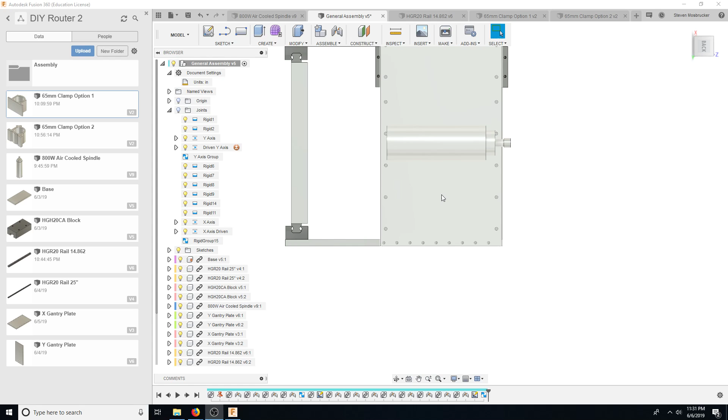We've done almost 4 episodes tonight or so, and I just wanted to clean this up because tomorrow is my last day in San Jose for a week, since I'm shipping out Saturday to Hawaii, Maui, and I'll be back next Saturday. Tomorrow I wanted to do a video focused on the Green Engineers to update everybody, but I also wanted to do a few more videos on this because I wanted to get this pretty much completed. So when I'm in Hawaii, I could be looking for lasers and also buy parts for this, because it's looking like we're really, really close.

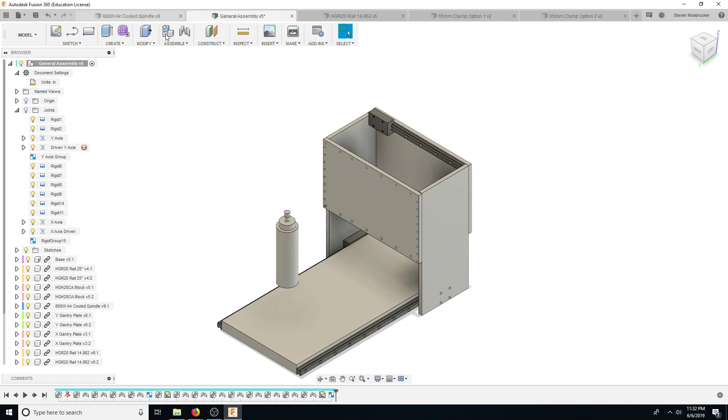I'm probably going to increase this to double so it doesn't bend, keeps it inside the cut. So we're going to put one here, one here. We're going to have 4 rails here with the regular HGH20CA block, and then we're going to put double here, double HGR20, so 2 blocks here, 2 blocks here, and then that should be incredibly rigid, and we'll increase it to about 100 pounds.

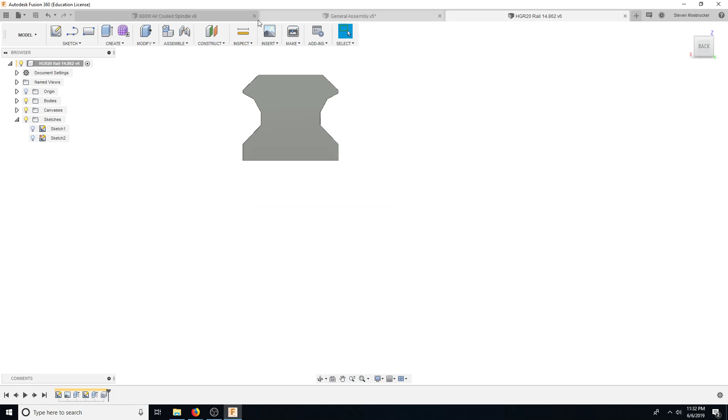Right now what we're going to do is delete this one and delete this one, and we're going to design the clamp. So the clamp, obviously the maximum here that we need to have is from this level to this level. And that is 10 and an eighth inches.

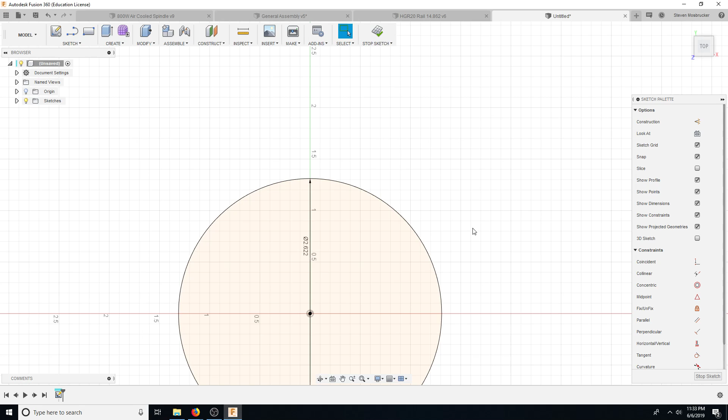Let's go ahead and start a new one. Let's create - we don't really need much, so we're just going to go here, top. And then this is going to be the 65 millimeter. Then what we're going to do is slit it so we can clamp it. Let's go ahead and add an offset of a 1/16, plus 0.0625 inches, just a little bit bigger - 1/16 of an inch, so that's a 32nd on each side.

If we machine it really well - again, this is going to be 10 inches tall, so probably machine this. I mean, that's pretty big. You're going to machine it all the way down, but again, this will also form a pretty good heat sink because it will be 6061 aluminum, and it'll heat sink it to here, and then it'll have a big mass around here, and then heat sink it to the rails.

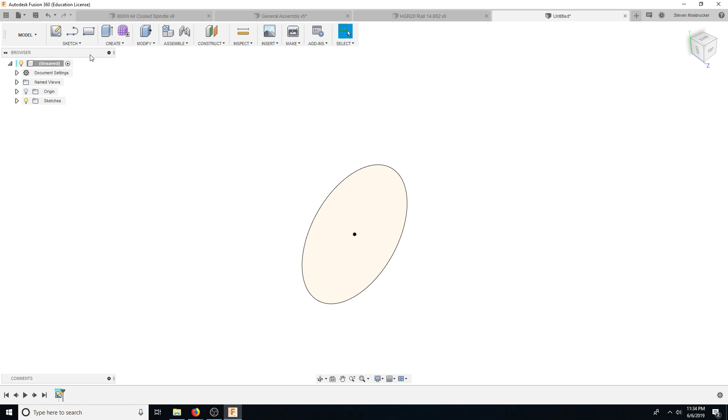So let's do that, and then let's go ahead and create an offset. Here, offset total - obviously we do not want to pass this other number here, which is the length of the carriage, which again is this overall length right here from here to here.

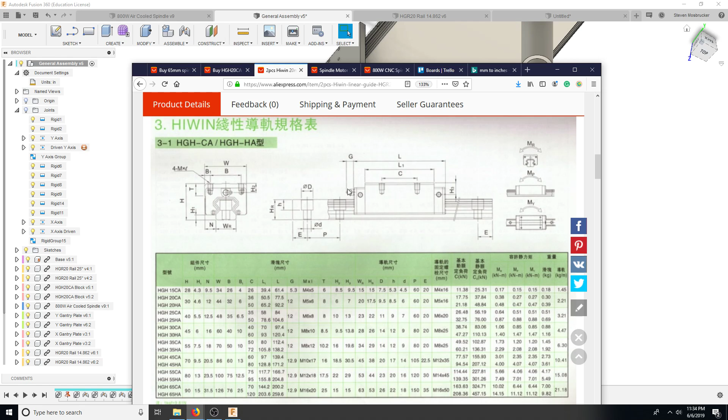Oh, and then everything - I'll probably take off the grease fittings and just put them on when I need them, because they're going to hit on one side. I'm going to lose something on one side anyway, so I probably should take them off. Down here, they're not really that big of an issue. I mean, it's going to hit the back wall over here on one side, but I think that side will be behind this gantry anyway, so it's not really that big of a deal either there.

Let's put - but these are going to be used a lot, so probably once a month I'll have to stick the grease fittings on there and redo it again and grease them. So overall length for the 20CA is 77.5, so we cannot go over that.

So this distance from here to here, let's go ahead and do that. This distance from here to there is 70 - let's just do 75 millimeters. Okay, so what do we have here? Again, this doesn't have to be big because it's going to be super... okay, so it's a little over 1/8 of an inch. That's going to be fine because this thing's going to be like, what was it, 10 and 1/8 long.

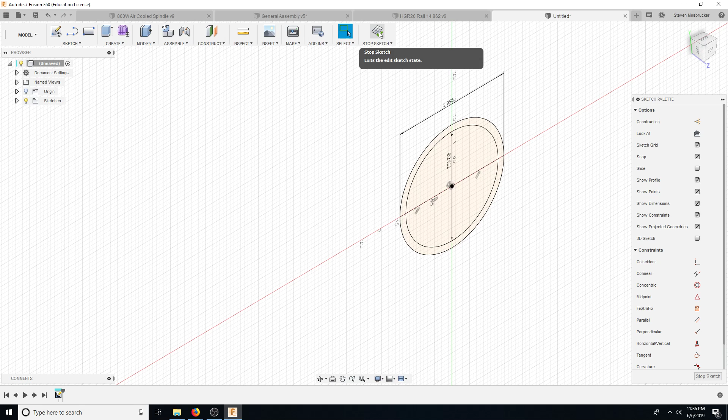So that's fine, and also it's going to have a flat section here. Oops, so we need to make the flat section here.

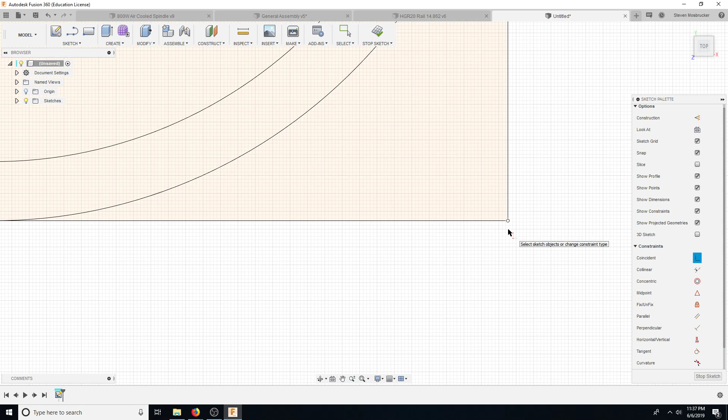And there we go. So that's a flat section, and then we'll have a hole here, basically, kind of just a slight flat section down here that will put these bolts in. And so that is C. So let's go ahead and do that now so we could draw it later.

So basically what we're going to do is we're going to go here, and then basically we want B divided by 2. So B is 32 millimeters divided by 2. So yeah, that's this. B. So there's going to be a small little flat section there. 32 millimeters divided by 2. Okay, so now that's going to be a small little flat section.

And so we're going to go up, but it's going to be bigger than that. So I'm going to say at least, oh, but it's not B, it's actually C. Okay, so we only need to do C. So C, because the rail's like this, so it's actually just C. So C is way smaller.

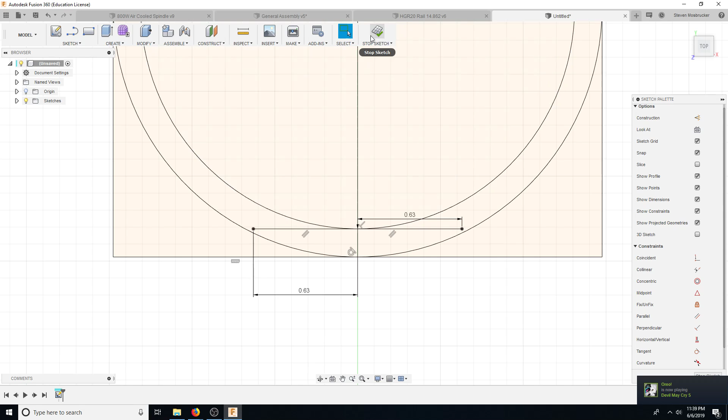So this should be okay. And let's go ahead and do this, this, this, and this. So it's going to be a small little flat section. Obviously, we can't make the walls around the wall square, so there'll be a fillet there.

But the issue is that that's really, really far down. But we only need it in certain sections. So we only need it at the top. We only need it at the top small section. So we could use a small end mill here and then hog everything else out.

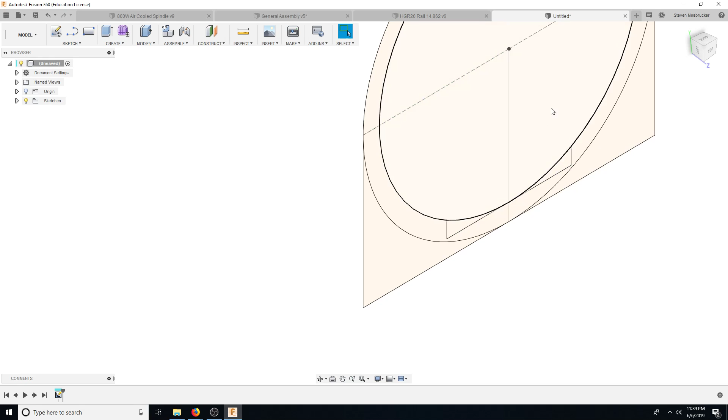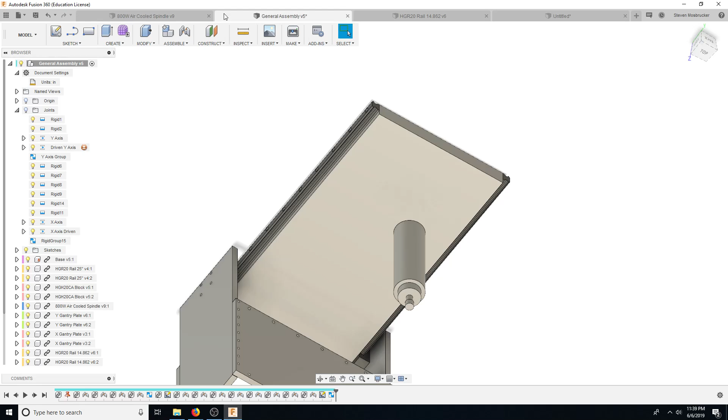So let's go ahead, I'm definitely going to need my XBoss to help me out with this here. So this is only going to be the width of the block, which is 44 millimeters. Oh, we can't do this because we need the Z. Completely forgot about the Z. So we need some sort of Z control.

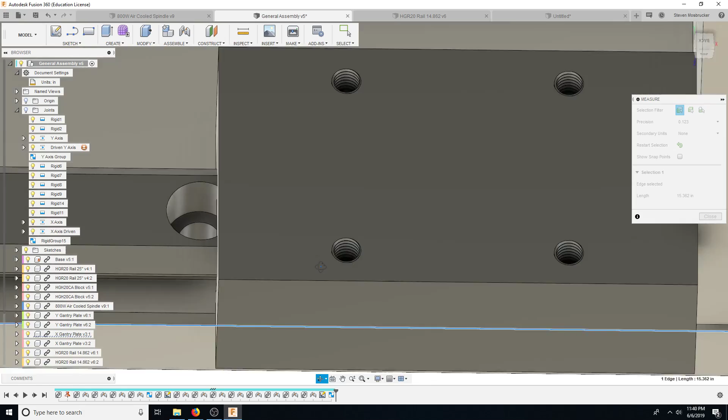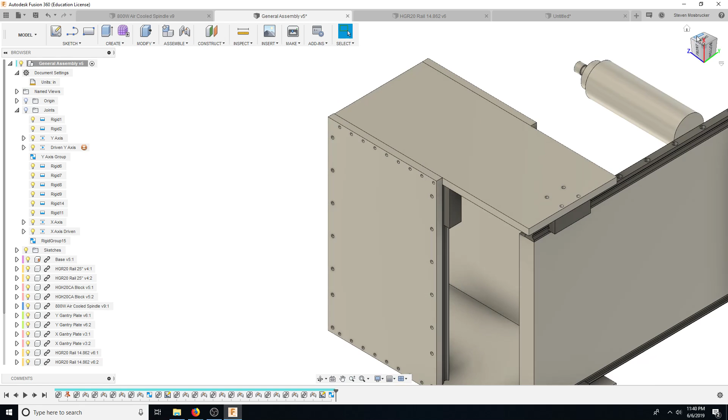So I mean, technically, oh, but then we need the width of the rails. The rails have to be next to each other. I mean, the carriages. So what's the width of the carriage? Yeah, this is 3.5, right? No, it's just 3. So yeah, 2 carriages won't fit on that.

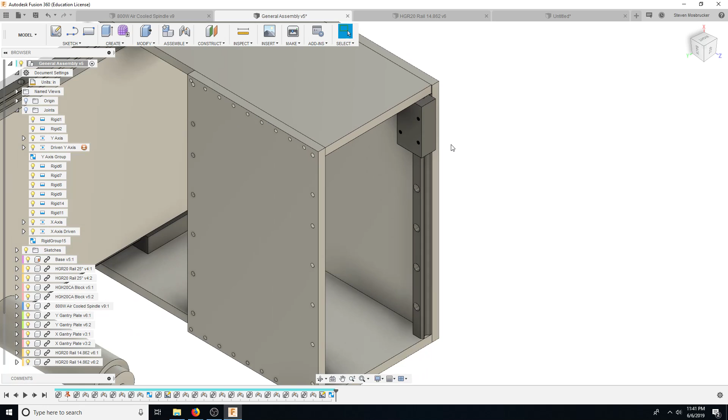Only one is sketchy. Oh, but we'll have another one over here. So, I mean, we do have a lot. I mean, but we don't have a lot here. But we have a moment arm down there, which is just as much as if it was over here. So we should be okay by just putting one of these guys, one of these blocks, which are... Oopsies. 1.732.

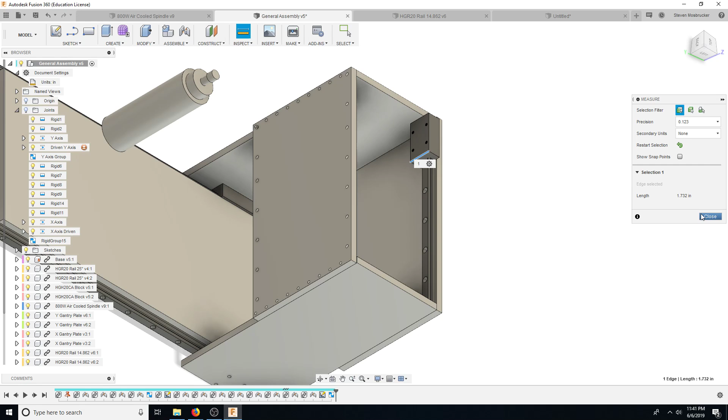Okay, so let's hold on this for now. And again, also, this thing doesn't need to be as big as I was thinking there because we have the Z. The Z is going to be the big guy.

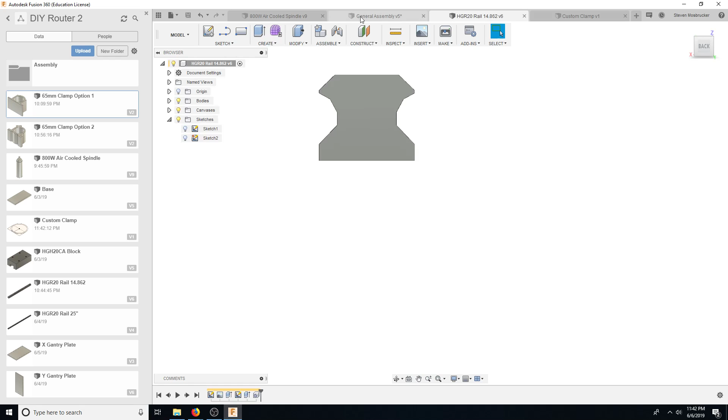So let's go ahead and look at this. So we're going to do the same rail again. So we're going to have a custom length rail that's going to go from here to here, which is 10.5 inches. So let's go ahead and duplicate, copy, paste.

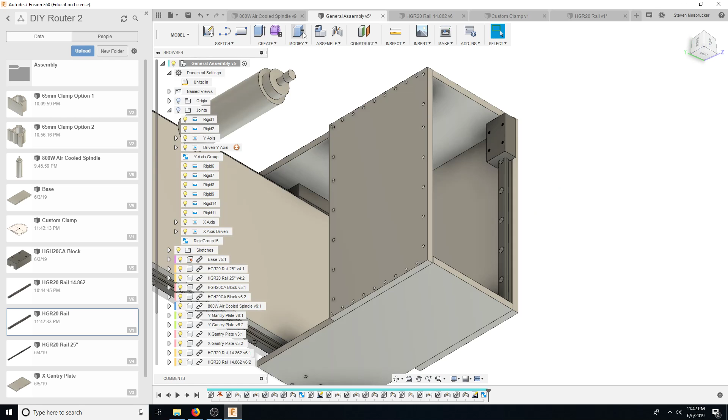Let's go ahead and look at this one again. I think it's this one. Yeah, 1142. Yeah, so that's right. First off, let's rename. And let's just get rid of this for right now, just so we can kind of tell. And then this is going to be 10 1/8. Oops. Actually, let's get exact measurements here. Yeah, 10.129.

Okay, so let's rename this. Well, that's okay, because we could.

So we could have it mounted on the bottom. This guy will go on the bottom because that's where we need the most, and not as much on the top. We'll have a bolt opening on the top, just go here or something, or we could always drill another one.

Okay, so now we got that. Now let's go ahead and design the plate, which is on top of the regular HGH20. We're going to want, we could put 2 of those on there. And we want a total travel.

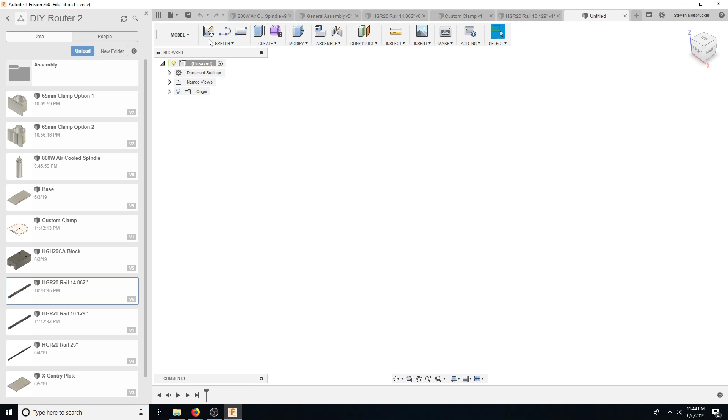Cat's looking through the window here.

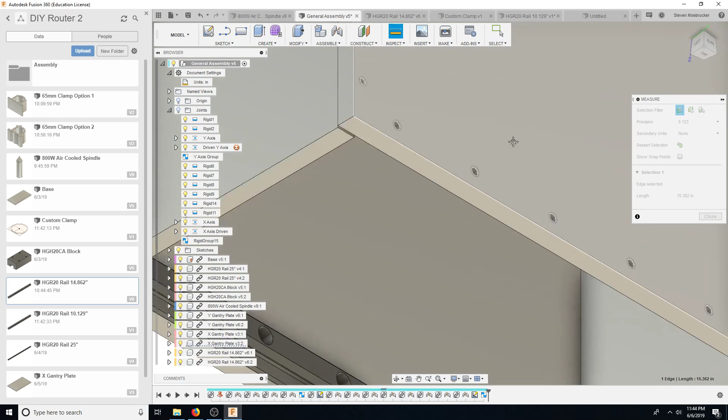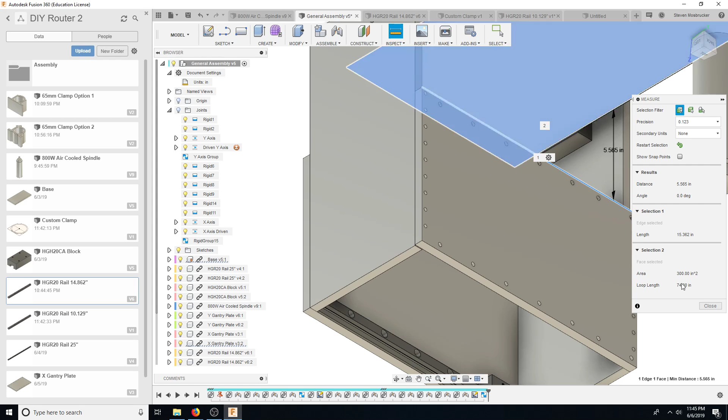Alright, so we want a total travel. This is 5.5 inches, minus about half an inch for the end mill. Let's say half an inch minimum for the end mill, and then most material is going to be at least 1/8 of an inch. So let's just say 5 inches of travel for right now. So what is 5 inches of travel? So this is a total of 10.

So can we get 10? We want 5 inches of travel, so we need 5 inches of movement. And these things are how long?

I mean, we could do one, and then obviously we're going to have one on the other side. So this is 77.5, 77.5, it's 3 inches. Yeah, so not enough for 2. That's 6 inches, so it'll need to be 11.

So unless we have this counter it off a little bit, we can't put 2, but I would like to do that just for the rigidity. So we might have it stick out a little bit. Well, it's going to have a plate underneath it, but the other issue again is with the grease, but we could have one grease going up, one going down. Not a problem.

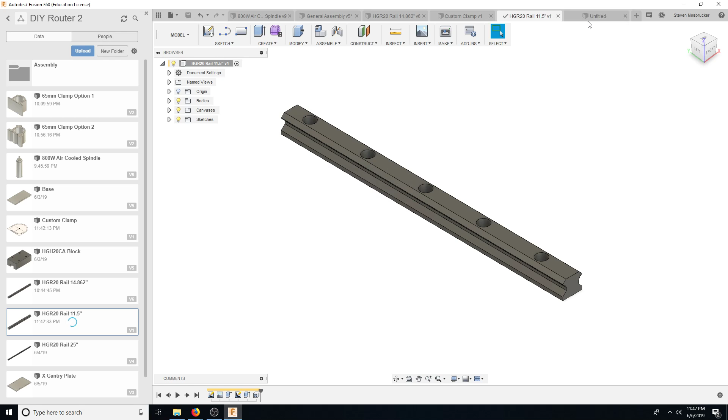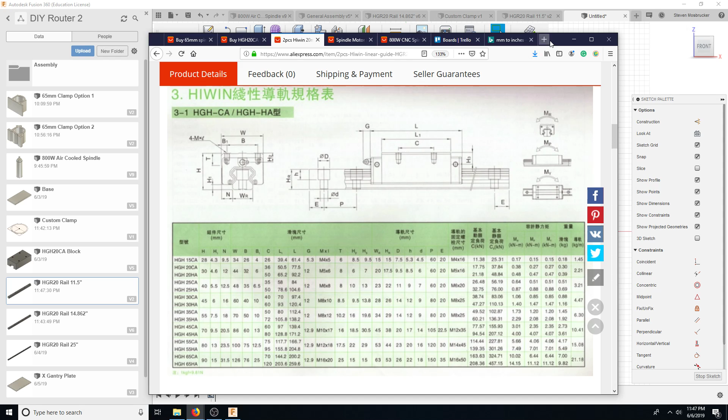Alright, so now the plate is going to be, let's just go on top here. It's going to be as long as these. I mean, it doesn't even have to be as long as these, it just has to sit on here, because any longer it doesn't really do anything. So L1 on those is 50.5, so let's just do 50.

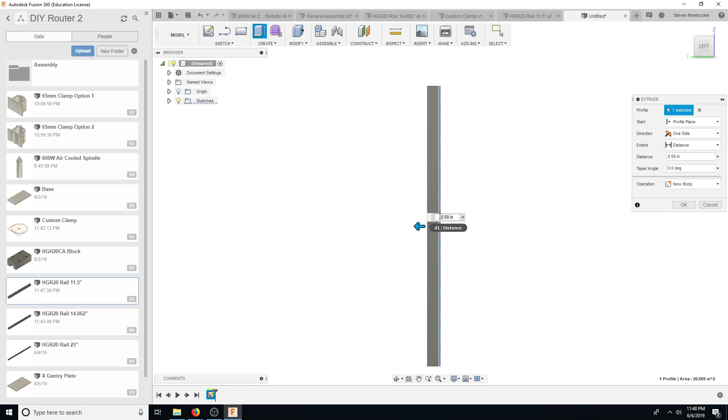0.50. Oops, the caps lock is on. And then this is going to have to be at least, what, 10.5. Okay, and then remember, the thicker this goes, the harder it is, the more we lose. And again, it's pretty supported, so I think 1/4 inch aluminum should be fine, 1/4 inch plate should be fine.

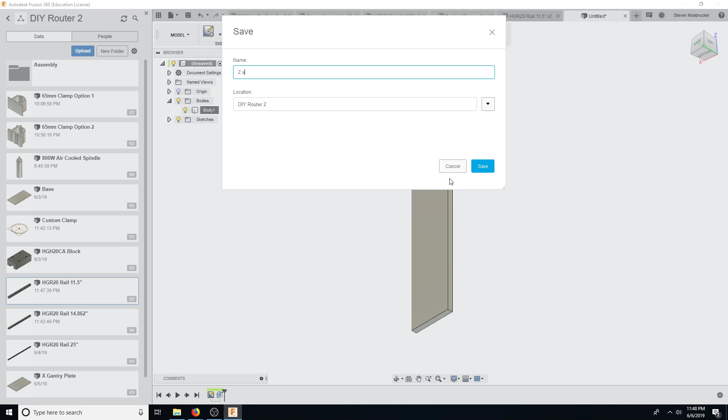And let's change the body style of this guy to physical material, aluminum 6061. Boom, boom, boom. And then this is Z-axis plate. What do you call it? Z-axis gantry plate. Okay, so there's a Z-axis gantry plate.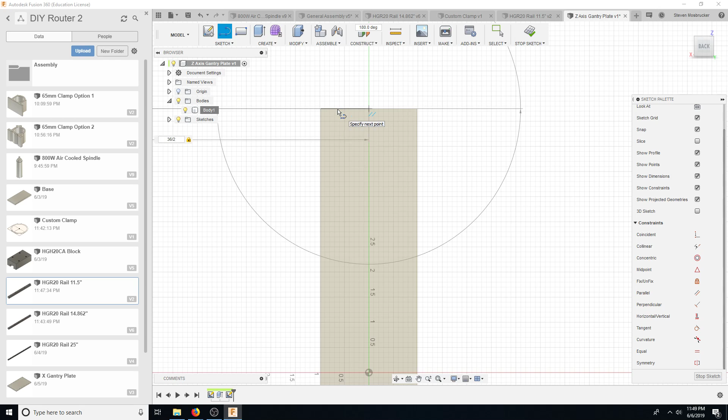Now let's go ahead and do the holes here. So at the top here we have W. Let's go ahead and draw a line from the top. Well, we don't really need to, but now we need W, which is, or C. It's going sideways, so we just need C here. C divided by 2, which is 36 divided by 2, which is 18.

18 mm that way, and 18 mm that way. Okay, which that's correct, right? Yeah, that's correct. And then this, we're going to have B1 from the top, which is 6 mm. So that's the actual point right there. And then this is also 6 mm, 6 mm.

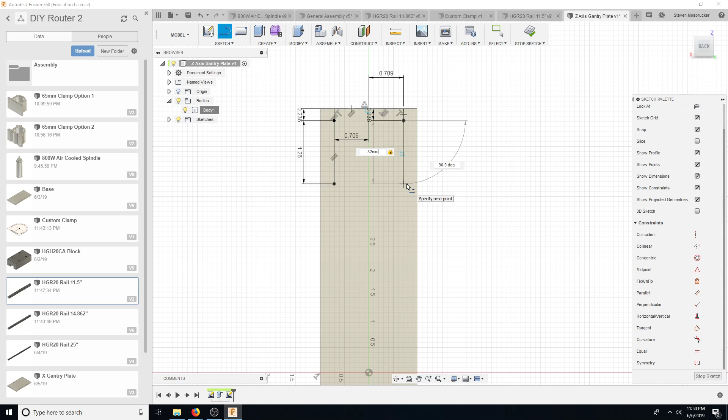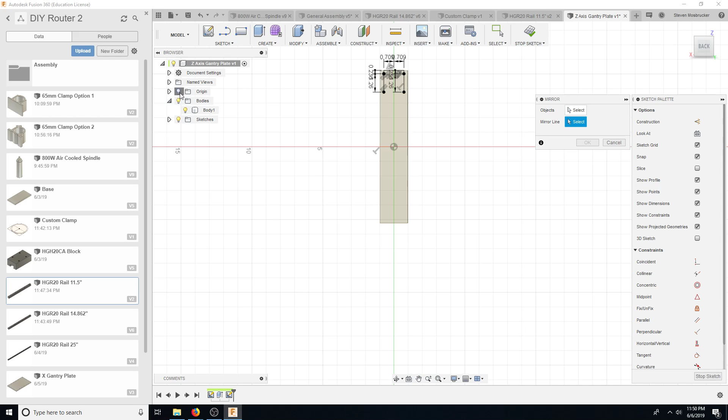And then B, which is 32 for the next set down, 32 mm. This one also down, 32 mm. Alright, so now C split, that's good. And then point here, here, here, here. Okay, oops, so now let's do the same deal. We'll do the standard mirror procedure: mirror lines, open origin, pick that mirror line, close origin again, object, 1, 2, 3, 4, and OK.

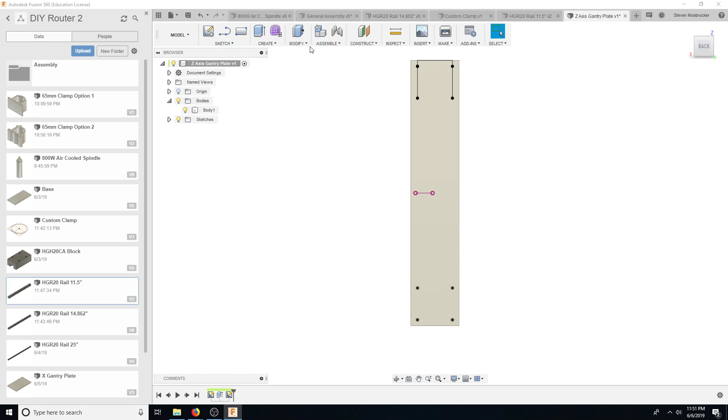And now these guys, we want clearance. I think they're M5s, so let's say 6 mm or something, just to help a little bit with location. So let's go and create a hole here, here, here, here, here, here, here, here. This is 6 millimeter, and through all. Okay, and it's just going to go through and bolt in. But we have a little bit of space there, but that should...

Oh, and another thing, this is going to be extra long, so we can't actually mirror it. That's a good point, we can't actually mirror it. Okay, so from here all the way down is 10.1. From there we have to do the same deal, so basically what we're going to do is just go halfway from there to there, where it shows it. That's halfway, and that's our mirror line. And mirror. Boom, boom, boom, boom.

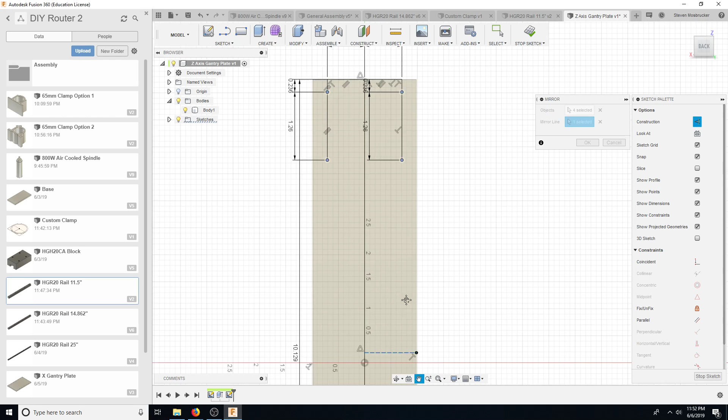Mirror line here, and there we go. Does that look the same?

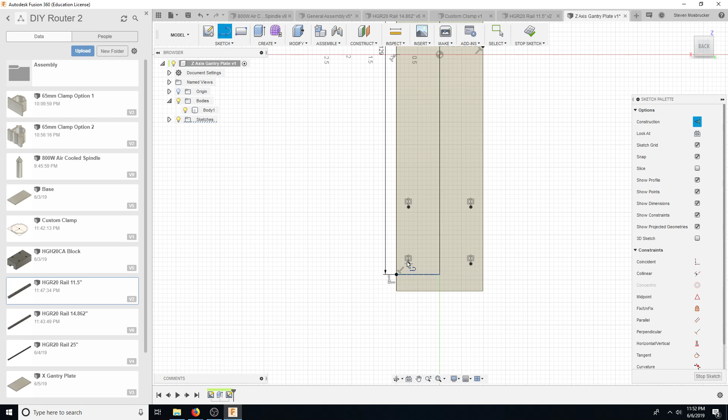That's exactly right. Okay, good deal. There it is.

Alright, so now we're going to create a hole. Why did I delete the hole? Strange.

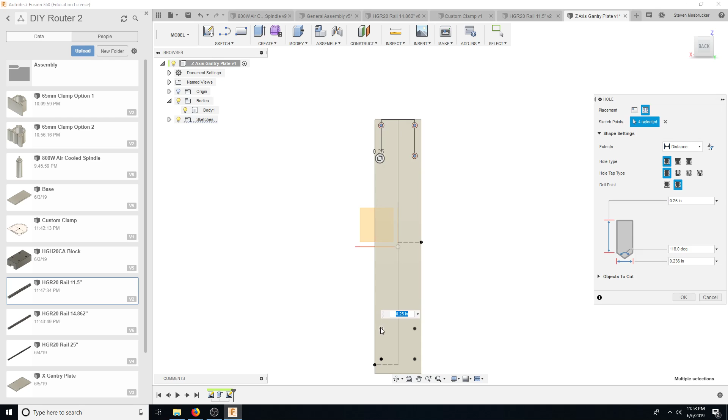It looks like it's already set to 6 millimeters, so that's fine. Let's go ahead and save.

Alright, so let's go ahead and go to General Assembly. Let's drop this in. Z gantry plate, drop it in.

And again, if we can make this half inch a little bigger, then we'll do that. Quarter inch, I mean, we'll make it thicker. Because again, we don't have that big of an issue with...

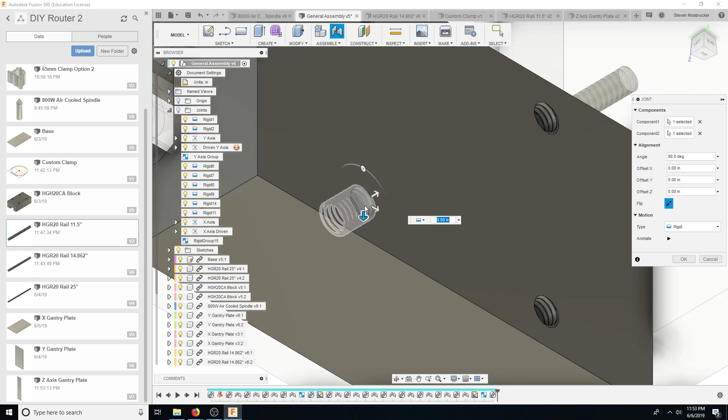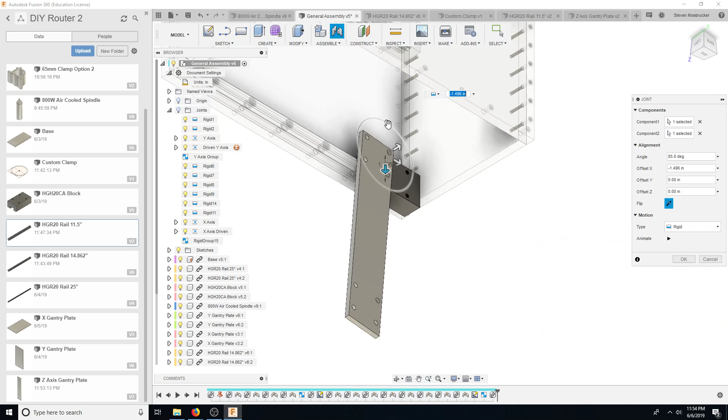This is flipped. Okay, so it wants the other. Oops. What the heck?

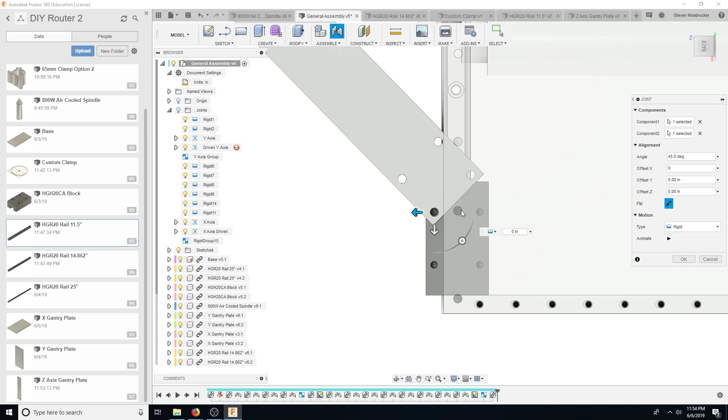Why is it doing that? That's not the hole I told you to. Oh. There we go, there we go.

Well, yeah, so they're not perfectly aligned, but I just kind of eyeballed them with the drive, so that's fine. Oh, and then we need obviously all of the dimensions there.

So we're gonna do another one here, and it's 20 and then 60. 20 here. Oh, but let's do it from the bottom, because this is where we're gonna have the most stresses.

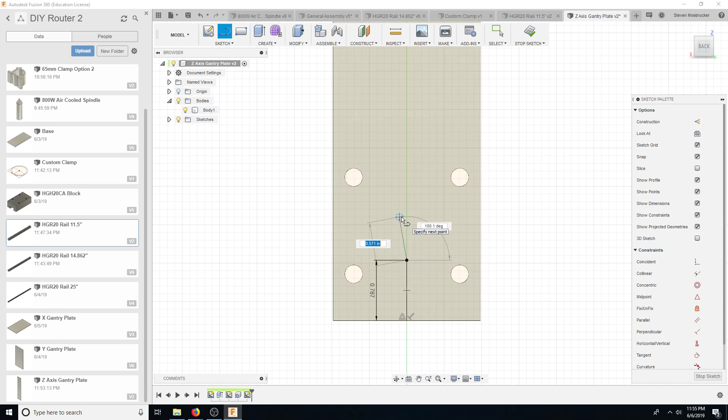20 millimeter, and we're gonna put a point there. And then we're going to do 60 millimeter every other one, 60 millimeter. And then we're going to put a point, and then do a rectangular pattern.

We're going to do this object and this object. And then we're going to do one direction spacing, 60 millimeters. So obviously that's the wrong way.

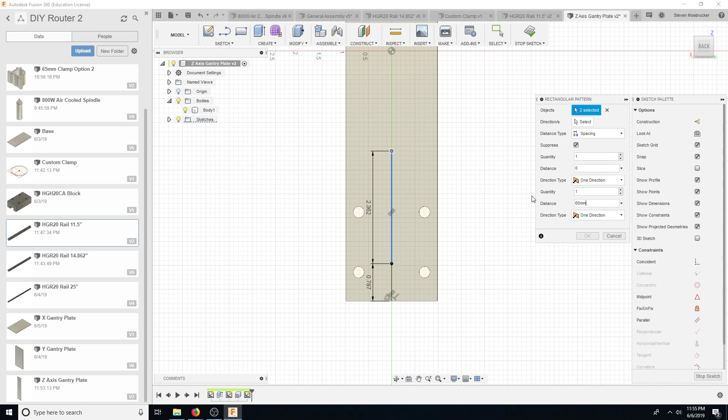Let's do 0. This is 60 millimeters. Let's see how many we could put. Looks like 4. Yep, exactly 4. Perfectly.

Okay, good deal. So let's go ahead and stop it, assemble, create a hole. Boom, boom, boom, boom, boom.

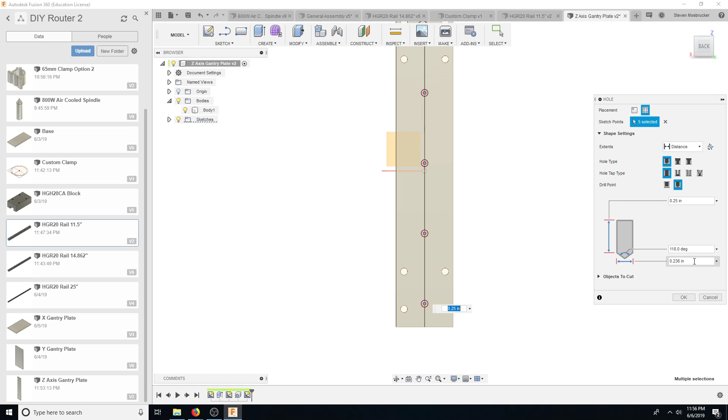And then this now is small d, so let's just make it 6 millimeters for right now, which is already is. So let's just punch those holes in it. Save. Back to General Assembly.

Update. Oh, 25 minutes already, jeez. And let's drop in the 11.5. Wait, did I make this 10.5?

What was the Z plate? Oh, yeah, that's 11.5. There you go. Okay, now it should be okay. It should still be okay because we saved everything.

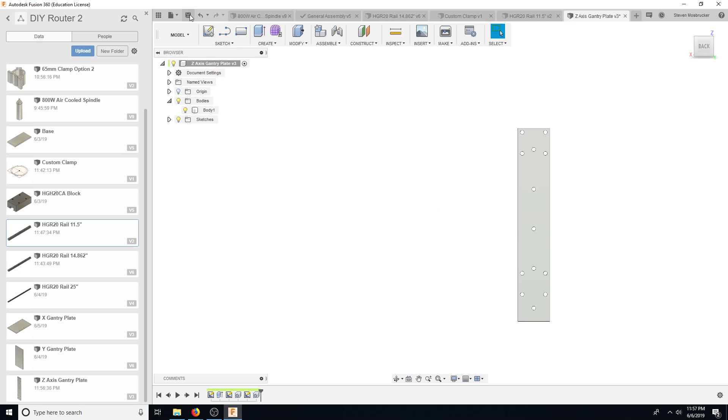Okay, there we go. Alright, so this guy's going from the bottom. So let's go ahead and mount this guy.

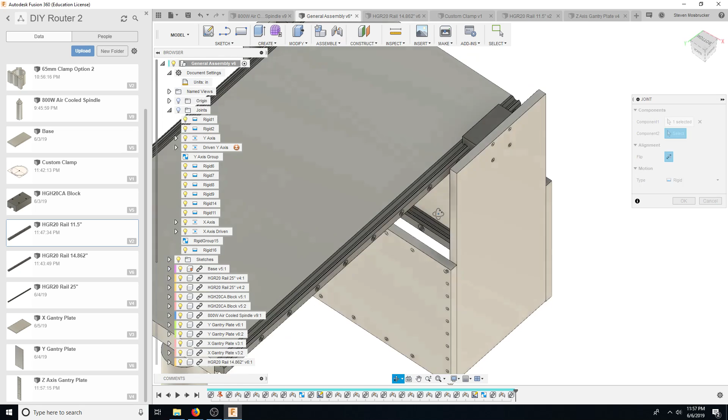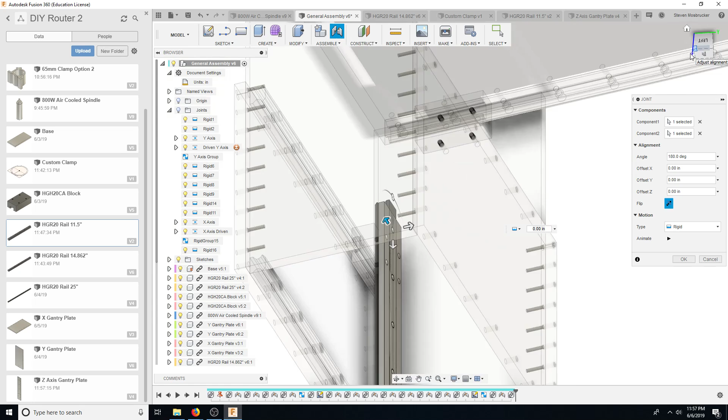Oops. With that guy. Oops, wrong side. Oh, I think I picked the wrong side. Where's the rail? There it is.

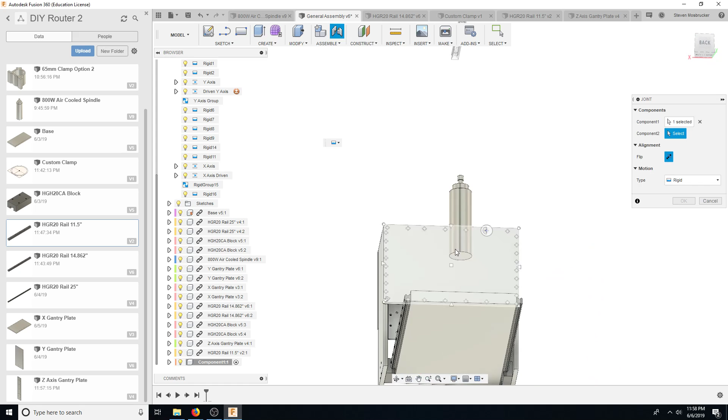There we go, that looks better. Sweet.

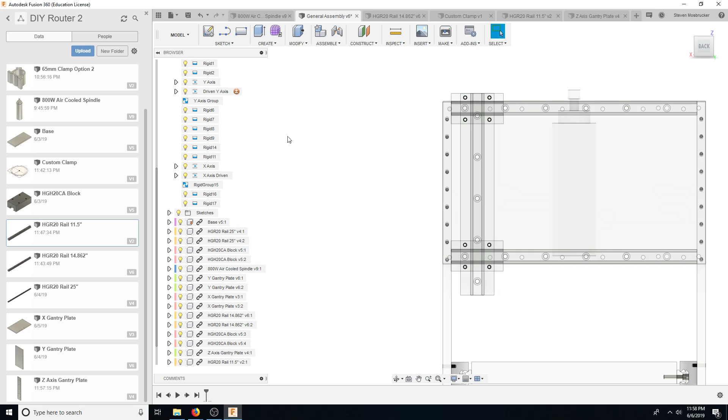Alright, cool. So now we could have 2 blocks on there. And that looks pretty good.

Why is everything still doing that? I already did the joint. Why are you doing this? Component 1, what is component 1?

Okay, so there it is. And then let's go ahead and drop a block in.

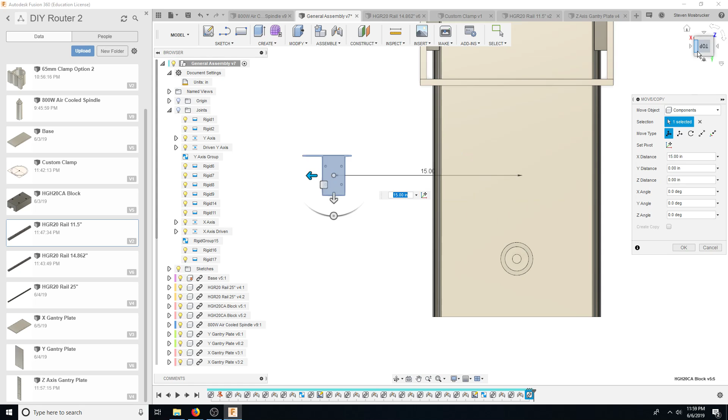We're going to do 2 blocks. As usual, one will be with the thing facing up, one will be facing down. You get the idea. Let's go ahead and go off of this.

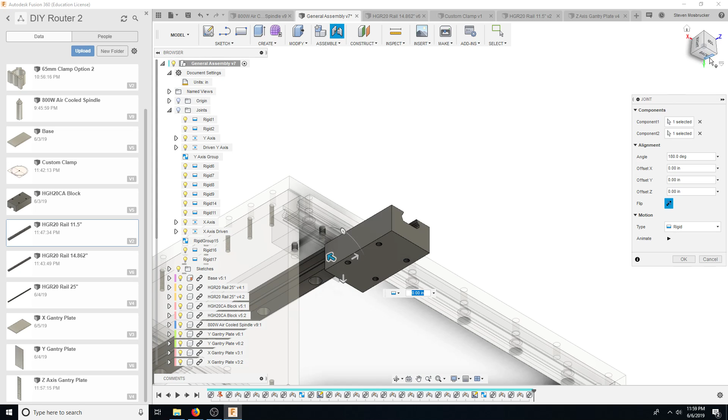Perfect. Perfect. Move joint down. There, that's fine.

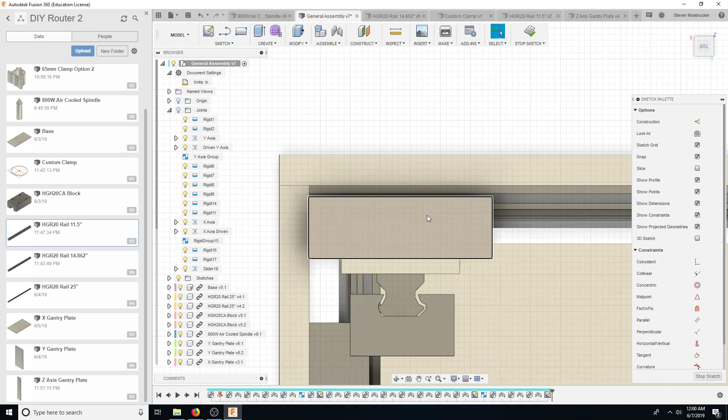Okay, then we're going to do the old school drawing. Project this one. Okay, and then this has got to be 30 millimeters here.

Obviously, at this point, I mean, I would probably just make an assembly because I've made so many of these already at this point. But 3.92, 3 minus 3.92.

Now this should be minus 3.92. Enter. Okay, good deal. So now when I look at this guy, it should be 3.

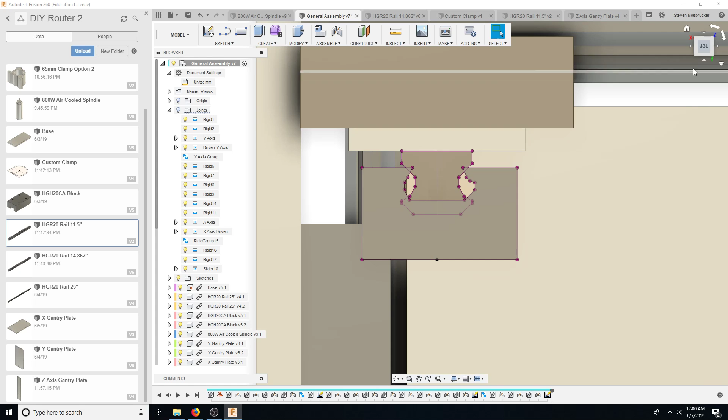Yep. All right, now let's do one more. Let's drop one more in. Looking at 29. We'll just finish this, and then next video we'll have to do the block.

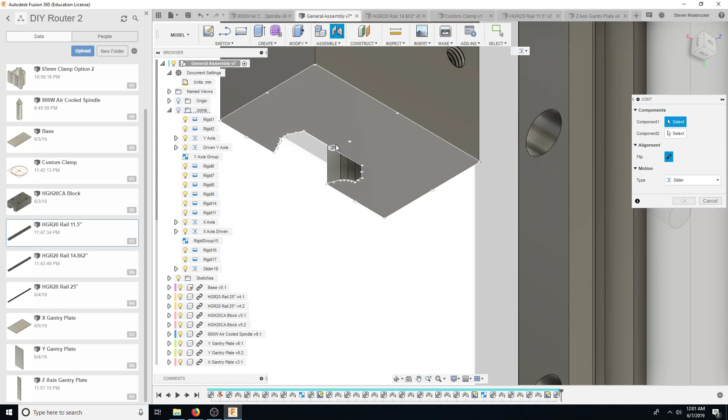I mean the actual, what's it called itself? The clamp. What?

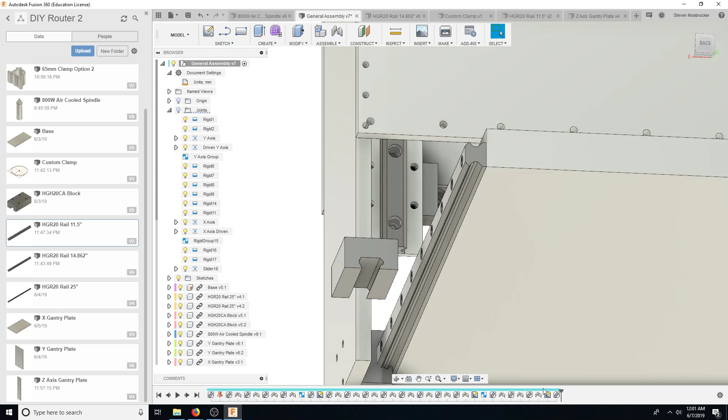Yeah, that looks good. So it's rotating, right? So let's go ahead and get this up on there.

Let's go ahead, I think it's the same deal. It should be the same deal. Project, include. Boom, boom. Drawing. Yeah, 3.92.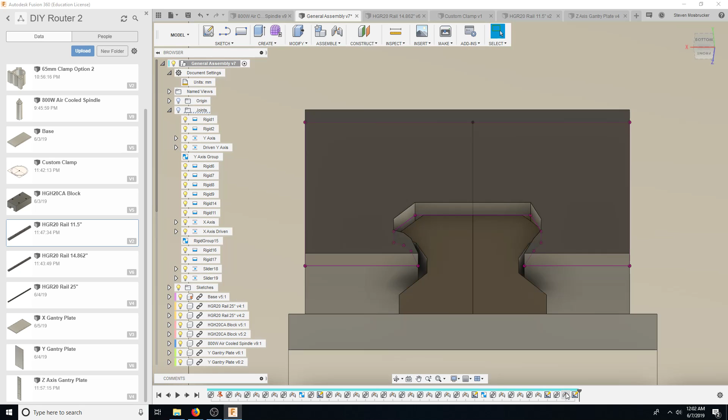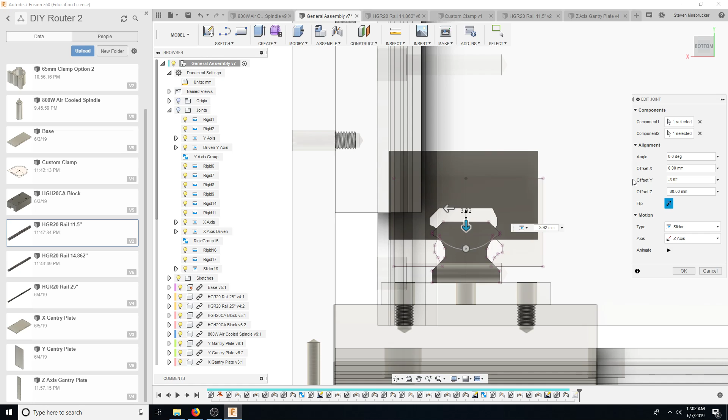Minus 3. So it's going to be plus 3.92 in. There we go. Alright, change everything back to inches.

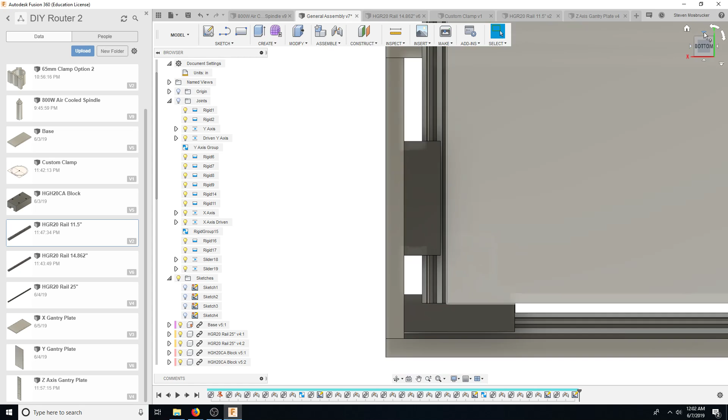We're going to hide these new sketches. Hide. Everything looks nice and clean. Let's go ahead and save.

What I'm going to actually do is drive this last one up really, really close. This last slider drive joint. I'm going to drive it up really, really close to this other one.

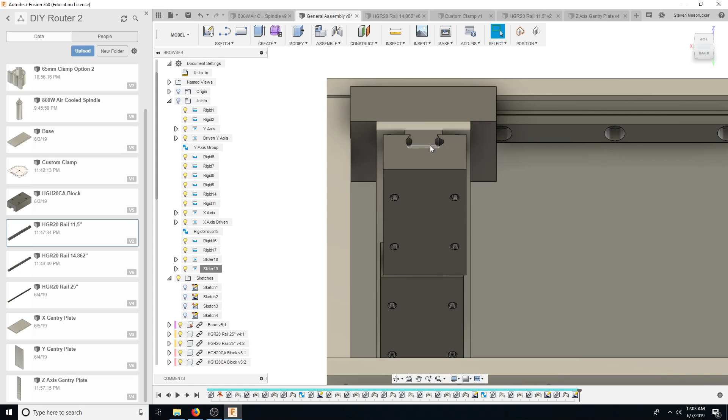You can see they're kind of misaligned. I don't know why they're misaligned. But anyways, before I order all this stuff, obviously before I cut it, I'm going to make sure that everything lines up in the CAD, because obviously this is not going to work. So basically what that means is that this is not exactly in the center, and so that means that this other length is off. So that's not good.

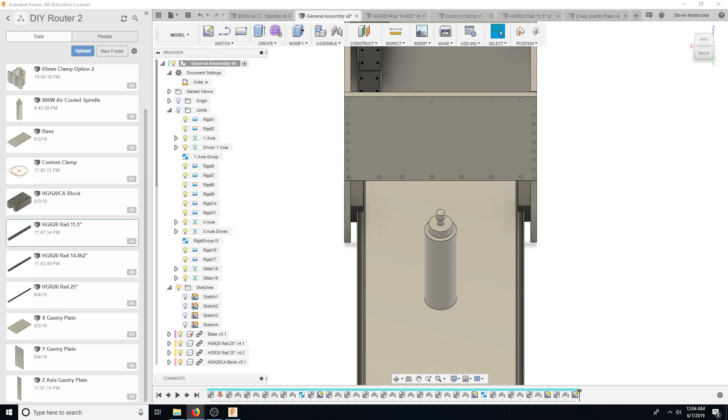So obviously the Z plate's in, so now the clamp will go here. This guy is about 6 inches long, which is pretty much with this guy - what is this length here? So overall length is 6 inches long. Well, not overall length, I'm talking about the clamping length that we have. It's about 7 inches, so it's almost the entire thing. So we're almost clamping on the entire thing.

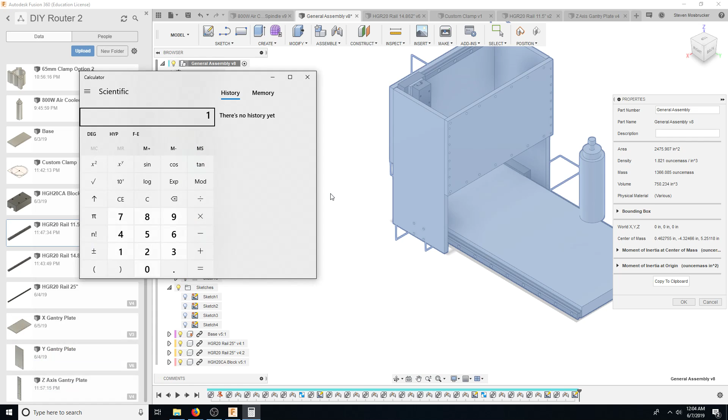Alright, so we're at 33 minutes. Let's go ahead and make sure everything's deselected here, and let's check our properties again. Alright, now we're at 1,366. We're not quite at 100 pounds yet.

Obviously when we get 1,600 ounces - there's 16 ounces a pound, right? Yeah, 16 ounces a pound. So obviously we need a second one here, and we need another 2 rails here, and then maybe another two of these also. So we're definitely gonna hit that 100 pounds, and this is gonna be incredibly stiff.

So obviously we need to do this over again. I might do that off screen. I might just duplicate this off screen because, you know, while I'm relaxing or playing video games or whatever. Because I mean, we already did it once. We do it a second time, you do the exact same thing over again.

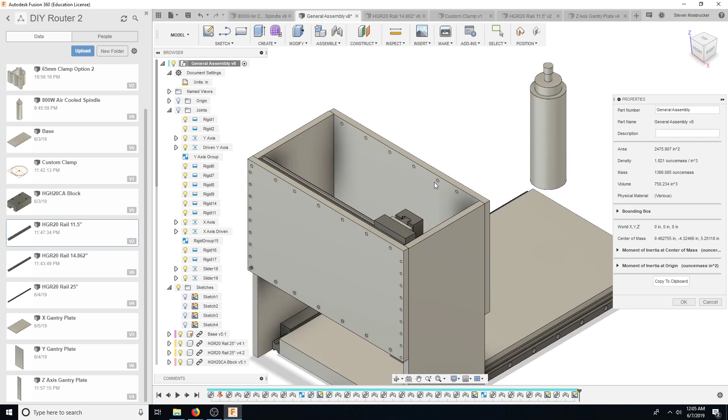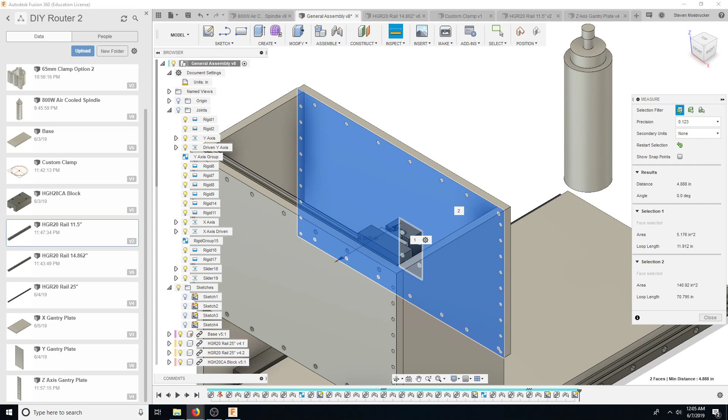And then I'll show you guys the fallout from that, which is basically going to be the clearance between here and there. So right here we don't even have a clamp yet, and we're already at 4 inches. So 65 millimeters is only 2.6 inches. Not too bad. But you have to think that we need to lose this distance also.

So 2.6. Let's do this last calc before we hit the sack here. Get ready to hit the sack at least. So 2.612. Well, the total.

Let me see, do I have a pen? Oh, I do have a Make magazine pen, and I have a little Make magazine booklet. I need to figure out where my maker book is in my backpack. Oh, it's got the little thing on top to protect the pen. Let's go throw that away.

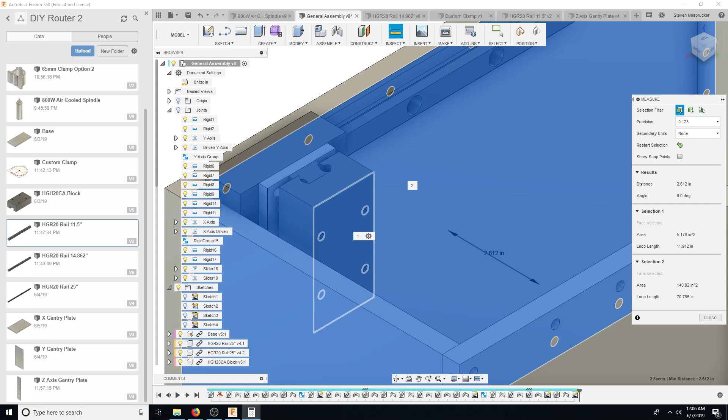So this is 2.612 to rail. So yeah, at the previous Maker Faire last year, they gave me a little notepad, it looks like. So that's pretty cool.

And then from here to here, this is 4.888. So 4.888 minus 2.612 - just because it's late at night, I don't want to make any mistakes - 2.612 is equal to 2.276, and that's obviously without any thickness on the clamp on either side.

And 65 millimeters is 2.559. So we're definitely going to have to make this wider. Right now we're at like 7.5 inches, so we're going to have to be almost maybe 8 or 9 inches. And then that will be super rigid.

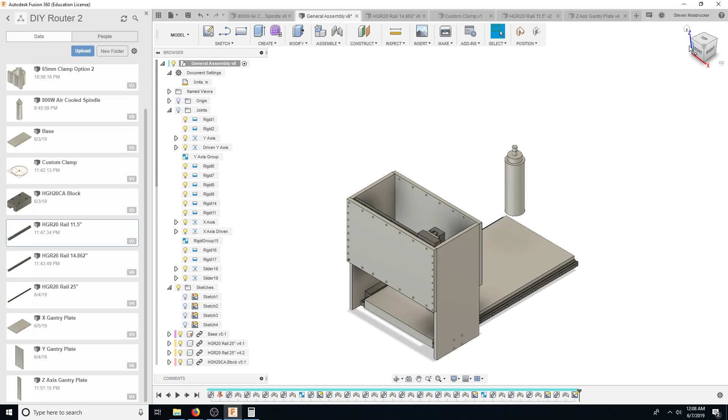We'll increase the weight a little bit. Obviously weight is good. It'll increase our cutting strength and also lower vibrations. So I think we'll be able to hit 100 pounds, but after that we're probably just adding weight for the sake of adding weight and not really increasing strength.

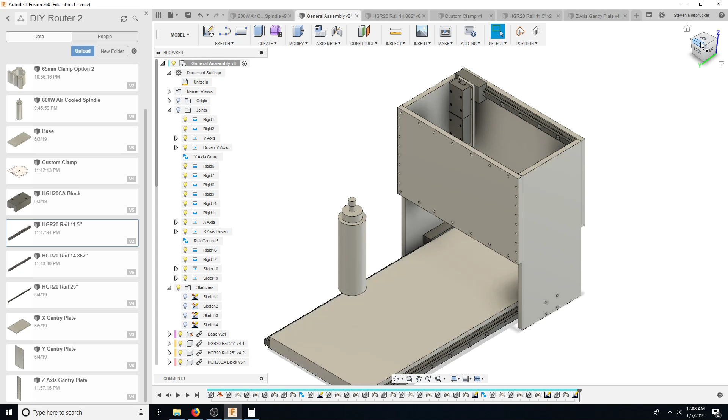Of course, we're going to have a T-slot table here, and also a fixture plate down here, and then also have material on the plate, and also have a fourth axis down. So we're going to have a lot of other stuff down there. So far, so good.